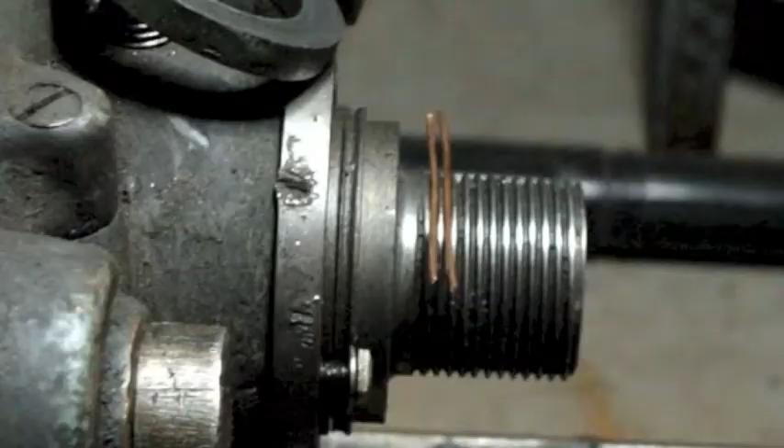Alright, here's where things get a little bit tricky. The idea is that you want to rest the two wires on the top right next to each other, and then what I want to do is, because this is a regular thread, I start in this groove here, this groove that I've got the left wire in, and I follow it down with the end. As I come down to the bottom, if I make sure it stays in that groove, I should now be exactly where it should be on the bottom.

Now, while keeping this all together and from moving, I now want to get my mic on here. So I'll open the mic up a little bit further, and hopefully, I'm holding the bottom with my fingers, so concentrate on getting the mic on the two top wires, because I can always hold the bottom one. No, not open enough.

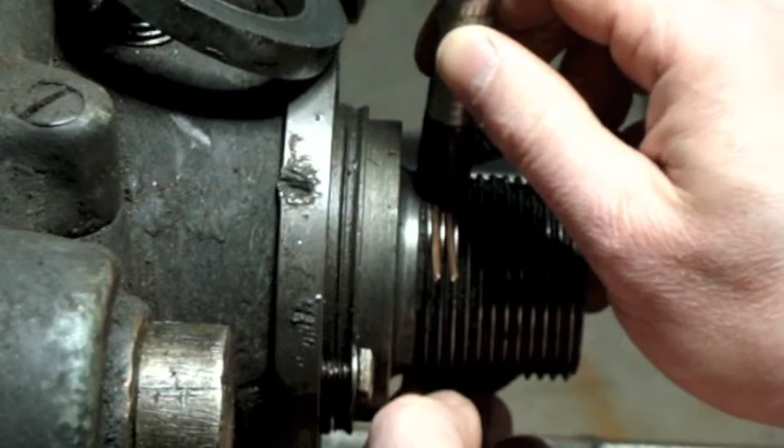A really uncomfortable position here. I got to get a light, check that from the bottom. Okay, I just checked, and it looks like I've got the anvil of the micrometer right where I want it. So this should be a good position to measure, right there.

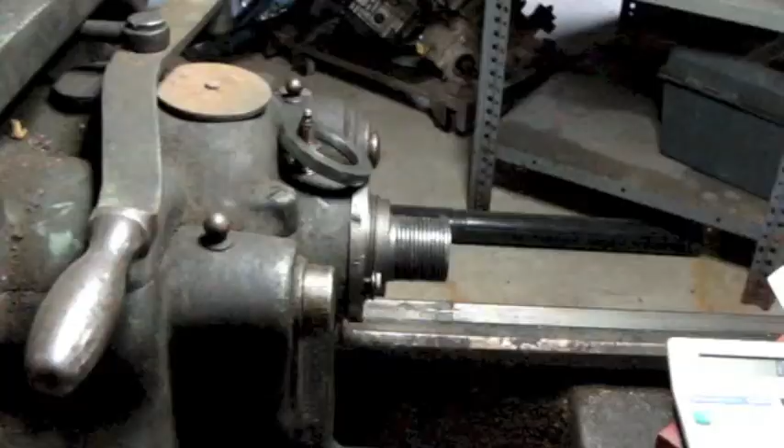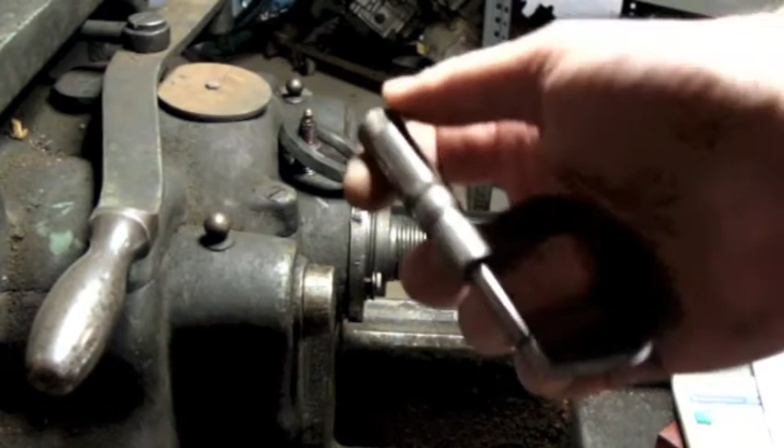Now this micrometer doesn't lock. Ideally I'd want a locking one. So now I'm going to pull this away carefully. Get the wires off of there. Take my reading. Okay, so I've got my measurement, over wire measurement is right here, 1.994 inches. And I did take a small micrometer and double check my wire thickness, and it is 63 thousandths.

So now I can plug these into my formula, and what I'm going to do is I'm going to assume that this is a 2-inch nominal, okay? And then I'm going to plug that all into the formula, and if it passes, then I'll know that this is a 2-inch nominal at this point, and it's got a taper to it. So I think that means that I can get a 2-inch backing plate with 8 threads per inch, and it would thread onto here.

Now I'm going to jump ahead for a second, just to let you know I already assumed that that's what it was, because based on trying to track down what other people's experiences were as far as the size of their spindles, a couple of people had mentioned that they believe that theirs is 2-inch. Well, lo and behold, that's obviously not a standard that was adhered to very much, because I've done quick searches on eBay, and I can't find one backing plate or one face plate that has 2-inch 8 TPI.

So that's kind of disconcerting, because that means that I think I'm going to have trouble finding a faceplate for this. I know that I've got my 4-jaw chuck. I would have liked to have gotten a 3-jaw at some point, but you know, even if I got a 3-jaw and tried to put another backing plate on it, I need a backing plate that's going to thread up to here. So, oh well. But let's run the numbers.

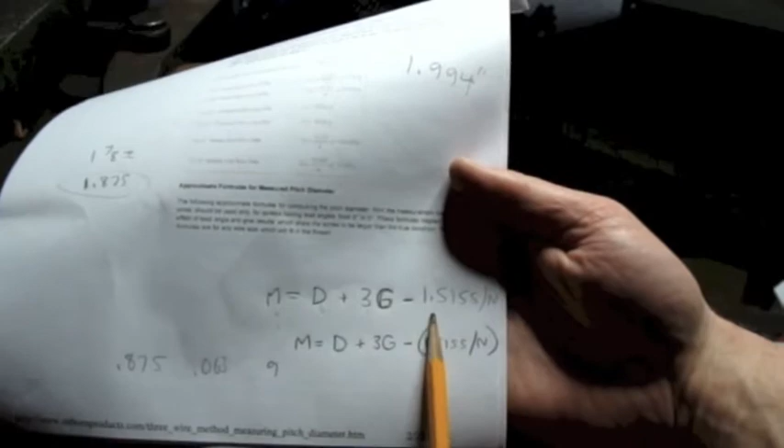So first, let me show you the formula we're using. This is the formula I got off of that YouTube video, actually. M is going to be the measurement we just took, is supposed to be equal to D, which should be the nominal dimension, plus 3G, which is the wire diameter, minus 1.5155 divided by N, which is the threads per inch.

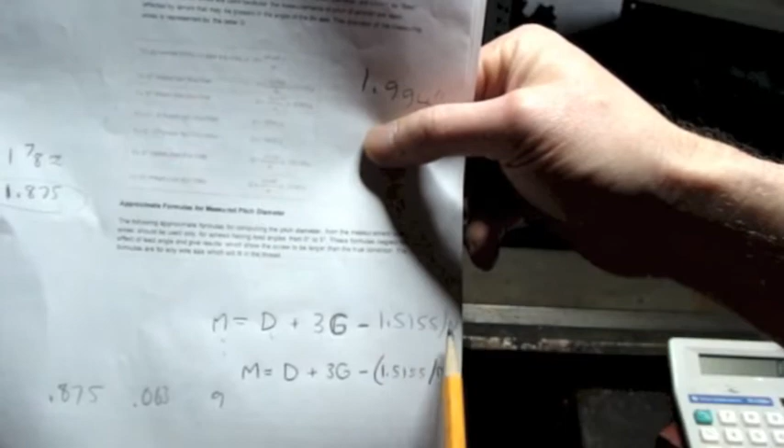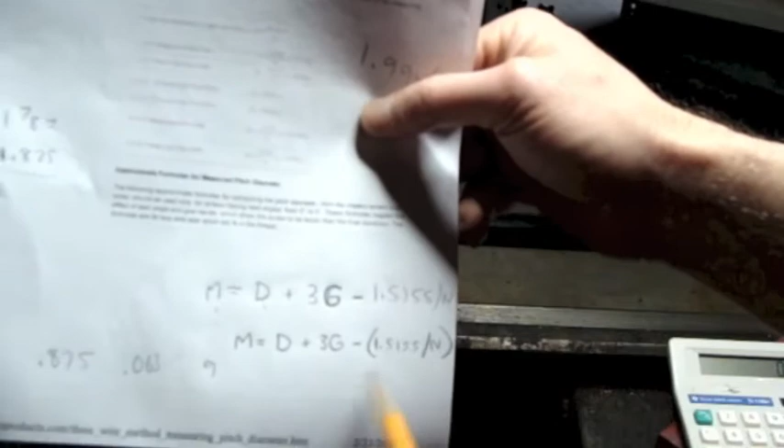Now I made one adjustment to the formula that he had written down there, because in my mind, thinking from my days of algebra, the danger with the way this is written is there's a temptation to add D to 3G, then subtract this, and then divide the whole thing by N. And I don't remember my algebraic rules about which operations go first. That might be what determines that. But just to make things clearer in my mind, I put the 1.5155 divided by N calculation in parentheses, so I know I will do that as a separate operation and before I subtract it from this other stuff. So now let's start plugging in some stuff.

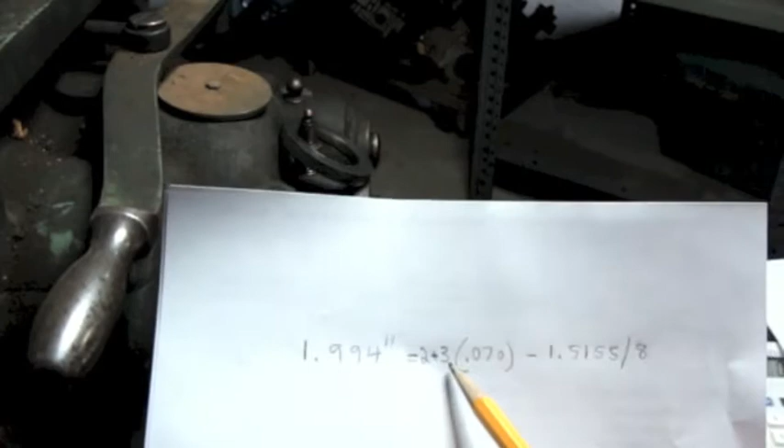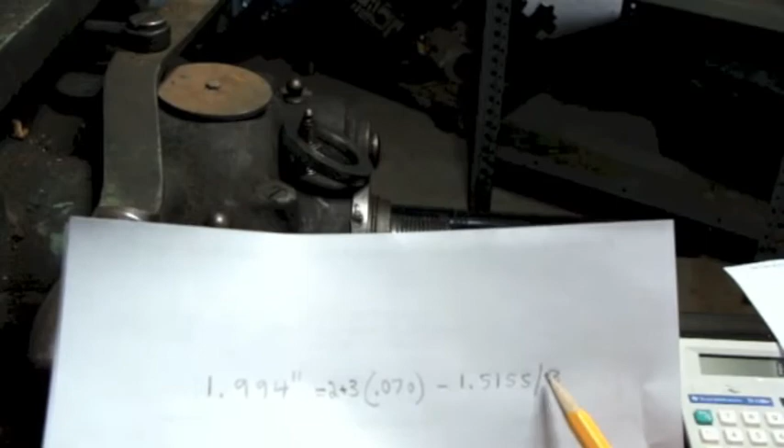All right, now, so what I've got here is my overwire dimension that I actually measured. This 2 is 2 inches for the nominal dimension that I think it is. We're going to add to that 3 times the wire diameter that I used, which is 70 thousandths, 0.070. And then we're going to subtract from that 1.5155 divided by 8. And again, I want to put that in parentheses just to make sure I did that

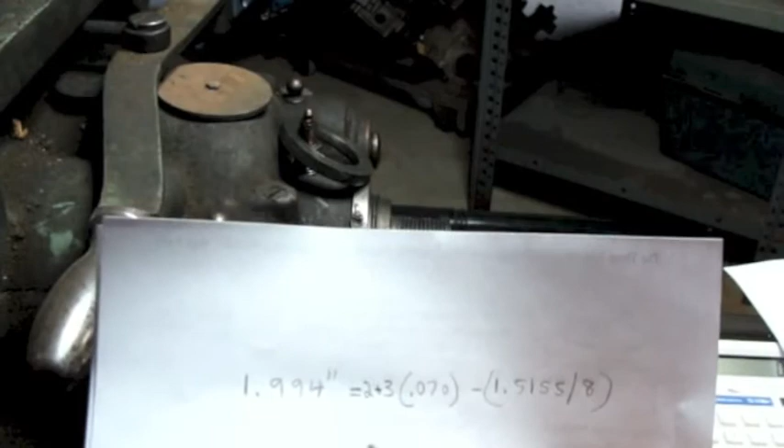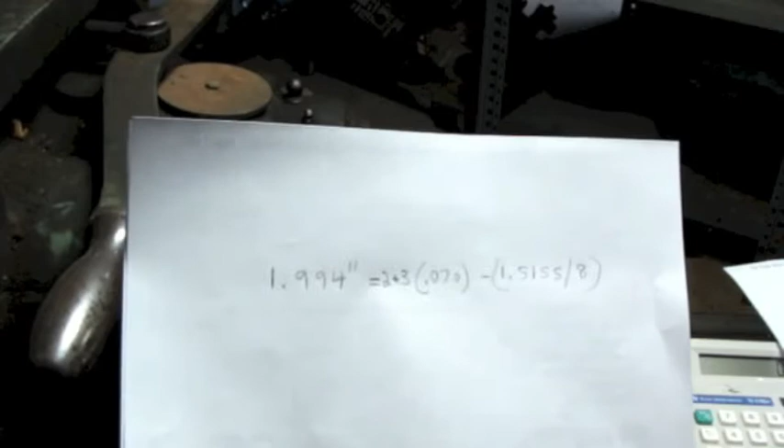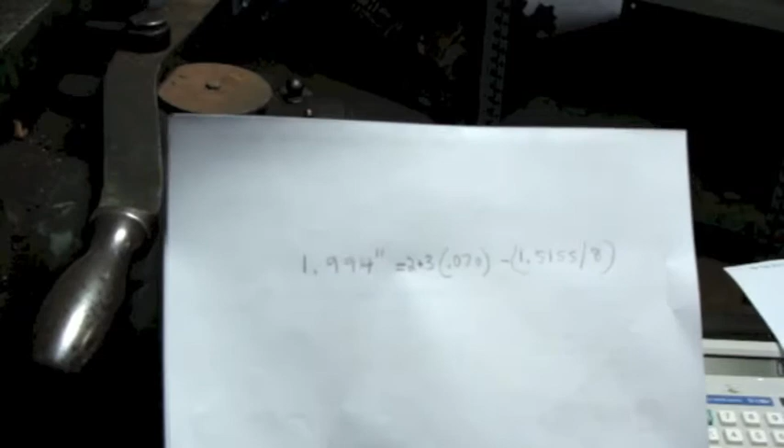operation correctly. Now, I don't expect this to be exactly this because there's clearance. In other words, there should be a certain amount of thread clearance between what screws onto the thread, and that's determined by, I think there are tables in the Machinery's Handbook, which I'm going to have to obviously get one of those at some point, that determine what the allowable amounts of clearance would be for a given situation, I guess.

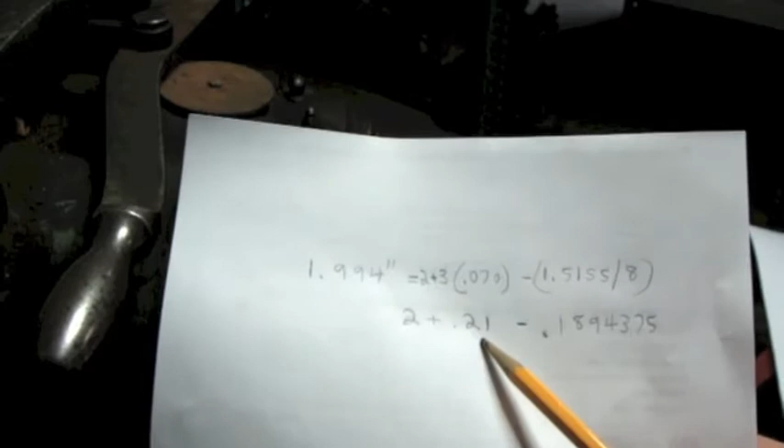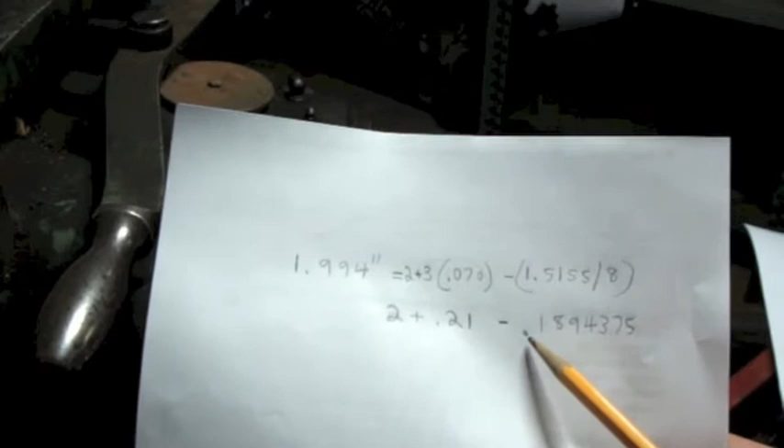So let me just crunch this real quick. Alright, so I like doing this in stages. It just kind of helps me keep things straight. So I took the 3 times 0.070, that's 3G, 3 times the wire size, I came up with 0.21. So I'm still adding my 2-inch nominal to 0.21, and then we're going to subtract from that the 1.5155 divided by n, which is 8 in this case, gives us this constant, 0.1894375.

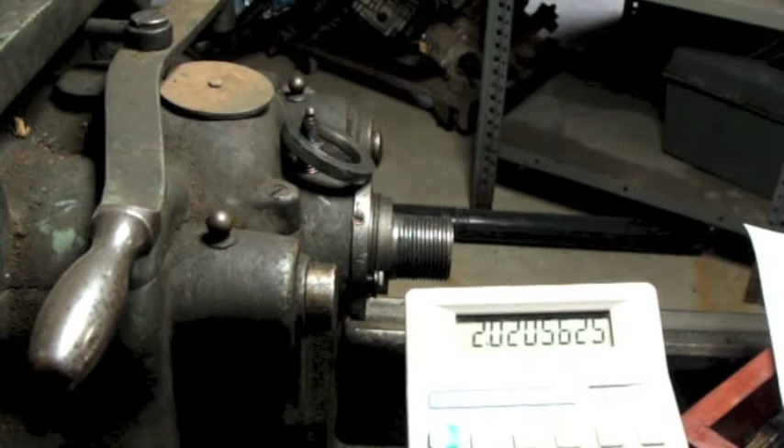So that comes down to 2.21 minus this big whole long thing here, which I'll do. And I get this number here, which is 2.0205625. 20 thousandths over 2 inches. So how much more is that than the 1.994 that I came up with over wire? Let's see how much that is. Oh, well, duh, that's 8 thousandths. Okay? So the only thing I can figure is that 8 thousandths, what we have to account for there is a couple of things.

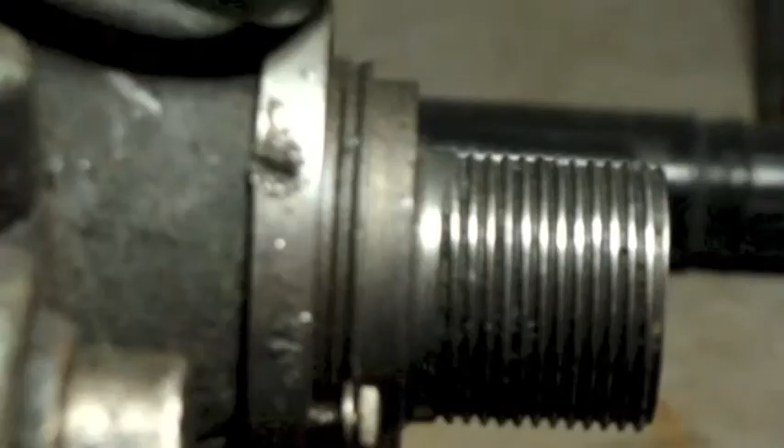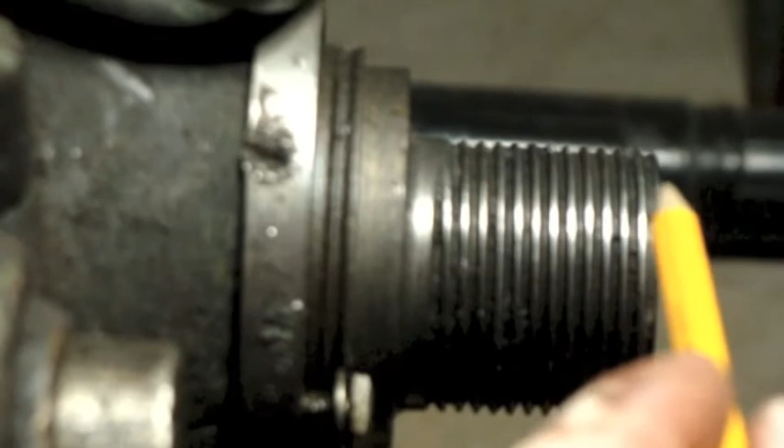I think we have to account for, A, we've got that thread clearance I talked about. 8 thousandths seems excessive, but I think also the thing we have to account for is I took my measurement here at the very end, and this is a tapered thread. So if I had taken the measurement back here, I'd probably be right where I want to be with that number. So I guess, I still got my wires. Why don't I do that? Oh, wait a minute here. That doesn't make sense because 2.0205.

All right. Pretty disgusted with my whole process here, so I'm going to try one more thing and then I'm going to hang it up. What I'm going to do is, because this is tapered, I'm going to take actual measurements here, here, and about here in the middle. And then I'm going to take over wire measurements at those same 3 points. And I'm going to run the calculations on all 3 of those locations and see if anything I come up with sounds like a typical thread spindle size.

If none of that works, then I'm still going to lean towards this being a 2-inch tapered Hendey thread, which means I'm probably going to have to wait a while for something Hendey to come along, or I'm going to have to talk to somebody about what they could suggest for solutions, whether or not I could turn an adapter that would go on here and then allow me to put something else on there.

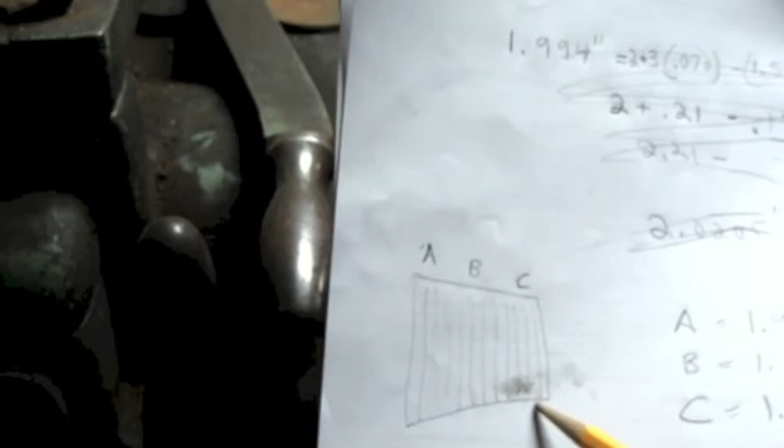I don't know. But rather than bore the heck out of everybody by having you sit here and watch me do all of these measurements, I'm just going to do them all and then write them down and come right back to you. Alright, here's what I came up with. I made myself a little diagram and I exaggerated the taper to show this is the skinny end of the spindle, and marked it A, B, and C.

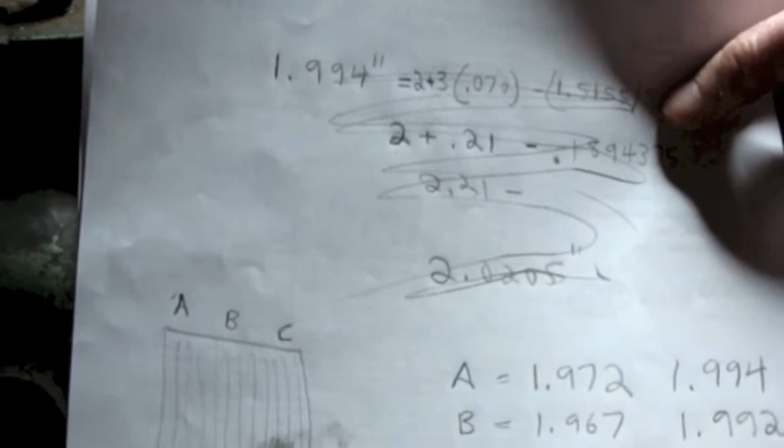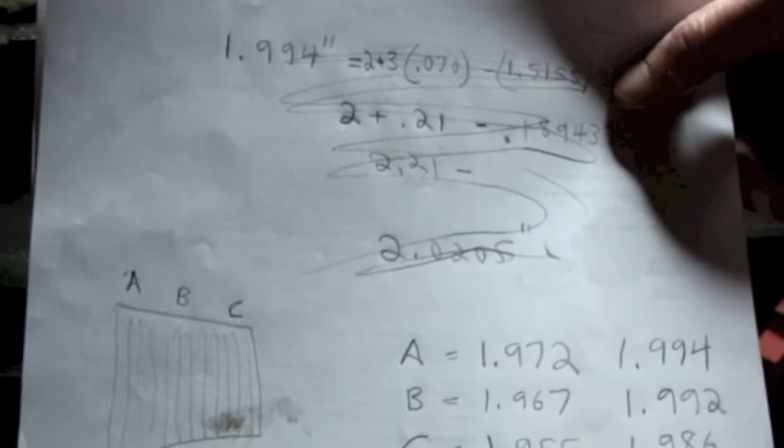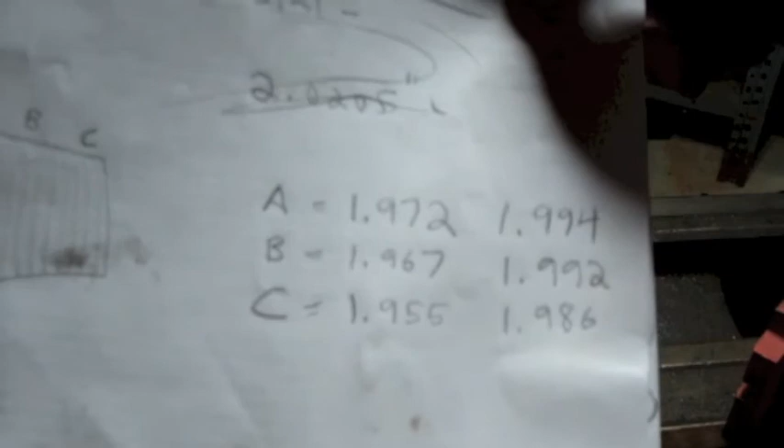So at A, I took not nominal, I took the outside diameter measurements and got 1.972 at the widest part, 1.967 in the middle, and 1.955 on the skinniest part. And then I took the over wire measurements at roughly the same positions. Now I'm going to run all those through the formulas and see what I come up with.